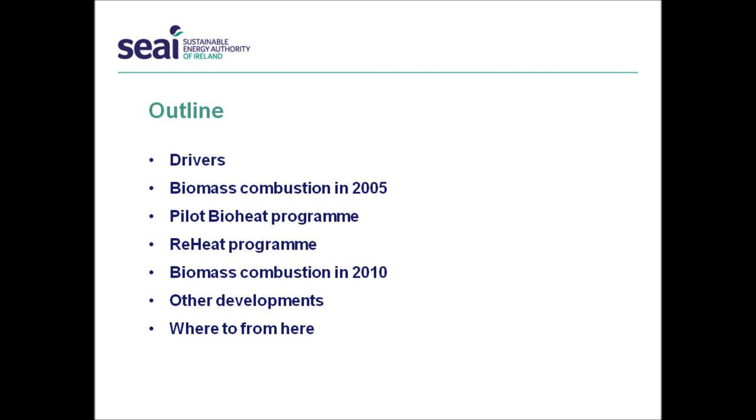So obviously the driver we're all familiar with, and I think it was alluded to earlier by Paddy, is the Renewable Energy Directive that's come in. We have targets nationally of 16% renewables in our gross final energy consumption, and 10% renewables in transport. And these are sort of devolved down to national targets, which are the 12% renewable heat that Donald mentioned earlier, 40% renewable electricity, and the 10% renewable transport. So that's what we have to achieve by 2020. That's the obligation we've committed to as a nation.

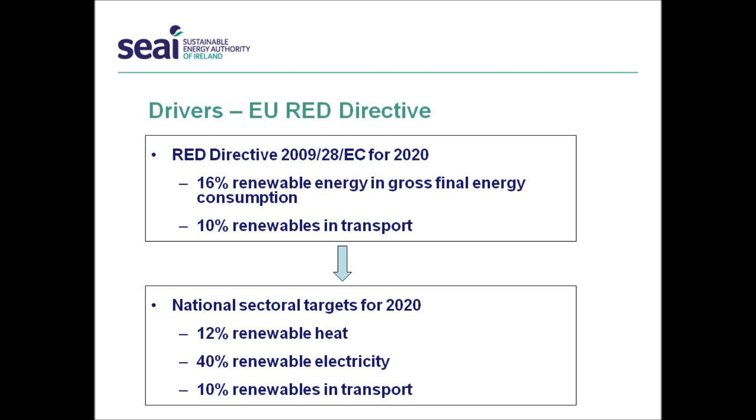So in 2005 then, where were we? Well, really, biomass heating was well established in the wood industry. The sawmills were using their residues to produce their heating for their processes, as were the board mills. So they were really the only activities in terms of biomass heating. There was domestic use, obviously, as well, but generally on a small scale and probably quite inefficient as a general rule.

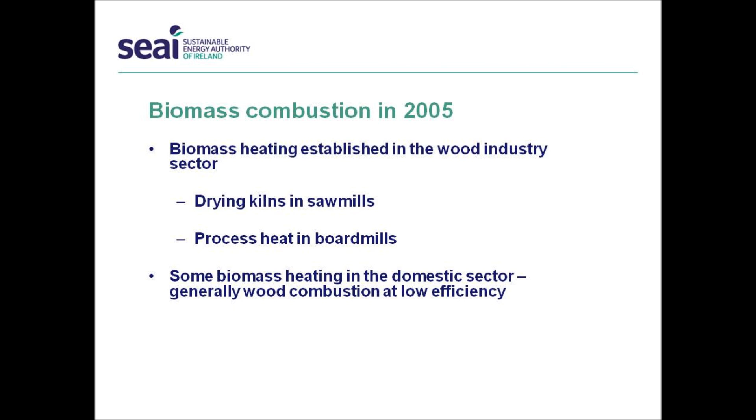So we started off in 2005 with what we called the pilot Bioheat program. And that ran for about 6 months, and it was targeted just at the commercial and industrial sector only. And the other thing we said was it was just going to be wood fuels, because there was a lot of experience in Europe with using wood fuels. There were lots of technologies. So we said wood chip, wood pellet only. We had set the capital grant at 25% of eligible costs.

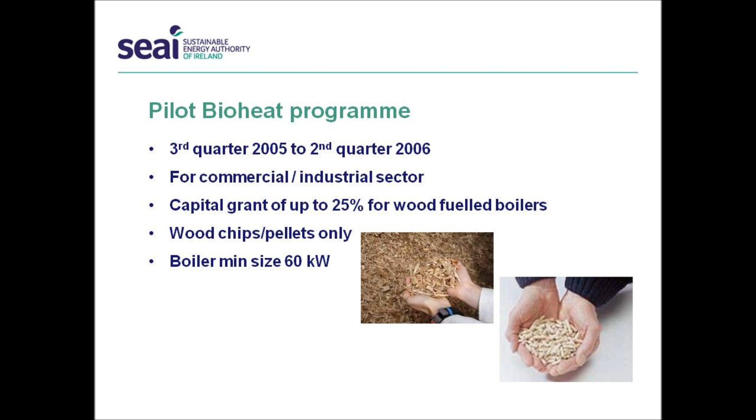And we also set a minimum size. We were really learning, and indeed we still are, but we were certainly learning. We knew very little about the sector at that point. So we also set a minimum size. We didn't want to be dealing with very small boilers, so we set 60 kilowatts. So that program, which lasted, as I say, for about 6 months, supported 17 projects with a total installed capacity of almost 11 megawatts of heating.

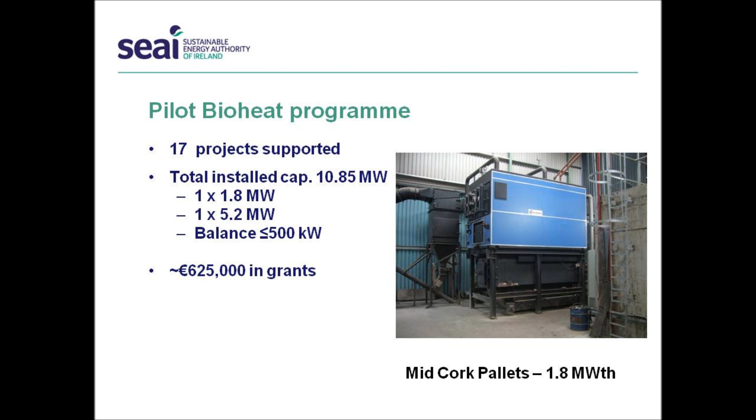Now, you can see that there were two large projects in that process. One was a 1.8 megawatt boiler, and one was a 5.2 megawatt boiler. The balance, most of the projects were sort of 500 kilowatt or less. So that's sort of indicative of the kind of market that we saw developing. In that program, we gave out a total of about 625,000 euros in grants. Now, I also have to point out that the one large one, the 5.2, unfortunately, the company that had that project made a decision on a bigger scale to move, so that boiler isn't actually there anymore. So that was the pilot Bioheat program.

And that was followed then by the ReHeat program, which came along in 2006, because the government decided to put some money into the renewable heat sector, and they committed money in the budget announced in 2005 for 2006 to 2010. Now we did a little bit more research through the pilot Bioheat, and we decided that the grant needed to go up, so we put it up to 30% of the eligible costs. We had an initial budget of 26 million for this program, the ReHeat program. Again, we restricted it to wood pellet, wood chip only, because the experience was there, again, to bring more of that into the market and try and get more deployment of these technologies in the Irish market.

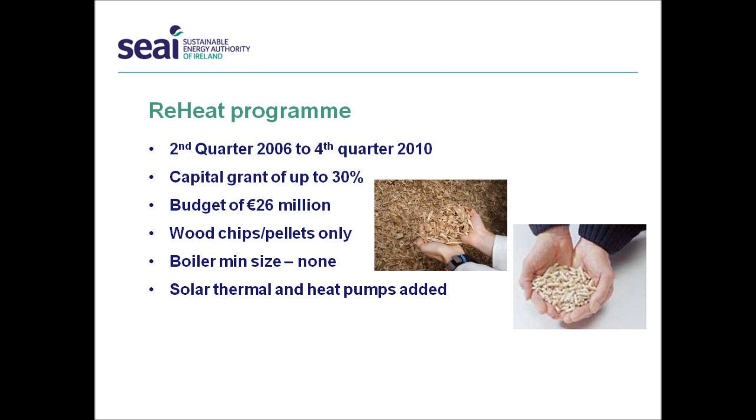The minimum size was taken away. We saw applications possibly in sports clubs and smaller scale, so we took away the minimum size requirement. But also other technologies came into the mix as well, because we're talking about renewable heat. So we're talking about bringing in heat pumps and solar thermal as well. They became part of the program. So that moved forward, and we supported programs like this.

Now, when we started off with the ReHeat program, it was primarily biomass boilers that were being put in. But you would see as the program moved over the years through 2007, 8, 9, the switch started moving towards the other renewables, which was the solar thermal and the ground source heat pumps. And I suppose we need to analyse that a little bit. It could be that the costs were more significant with the biomass as opposed to these other renewable technologies for which we were giving grants as well.

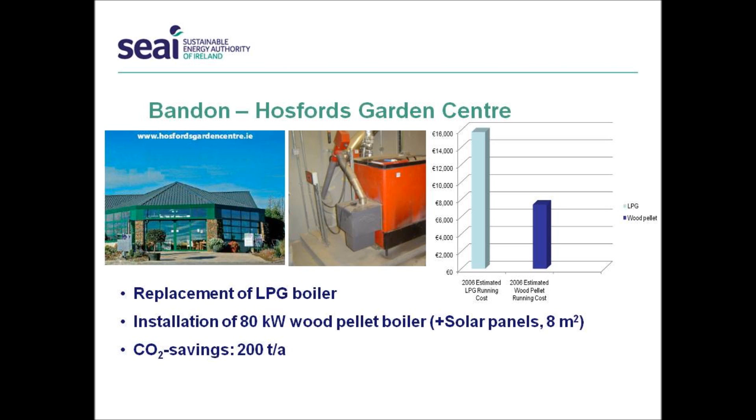But there was certainly a shift in that, and in another program I'm going to mention in a few minutes, which is the domestic program. So in the reheat program, in total we supported something like 190 projects, with a total installed capacity of somewhere of the order of 78 megawatts. Again, we had two large boilers in that program, 8 megawatt each. We had a number in the 1 megawatt, 1.2 megawatt, maybe 1.5 megawatt scale.

But again, most of the boilers that we supported under the program were in that 500 and less than 500 kilowatt scale. Now, we gave out only 8 million euros in grants for the whole program. And remember, we had a 26 million budget to start off with in 2006, and obviously things happened over the years. But nonetheless, the program did take some time to really gain momentum in the initial year, and I suppose that was again because of general inexperience with biomass boilers and the fuel supply chain and other things that were factors in that.

And unfortunately, as the experience was gained, other factors came into play, such as the budget was being cleaved off to other areas, number one, and number two, would-be developers were finding it more and more difficult to get money for the balance of the funding. So I think these were factors that were very important in play there.

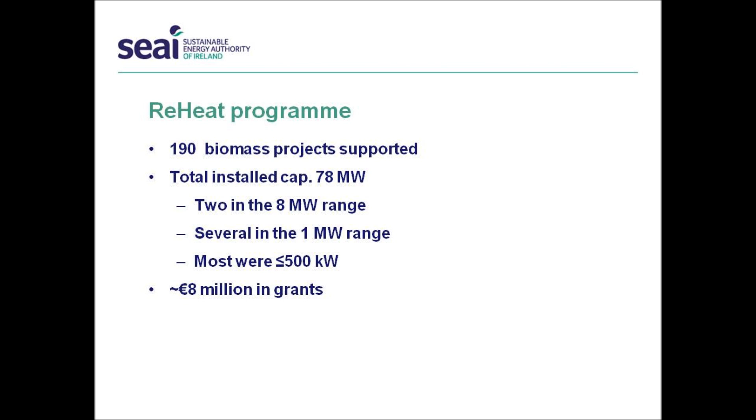Again, it covered the three technologies, biomass boilers, ground source heat pumps, and solar thermal. And there was a huge uptake from the very off of this particular program. And in fact, I think the initial budget was committed certainly within the first year. So the budget was committed for the domestic program. Over the life of this program, which went to the end of 2010 or a little bit into 2011, we supported something like 6,100 installations, biomass installations of either stoves or boilers or stoves and back boilers.

A technology, which is the one over on the right there, that was introduced later in the program, was these what are called wood gasification boilers. I think probably the correct term is two-stage combustion, but the term that seems to be most used is wood gasification boilers. And we supported about 171 of those. And you can see the grants under this program went to 78 million. So we had an initial budget of 27 million, but because of the uptake of this program, the grant commitment ended up being 78 million.

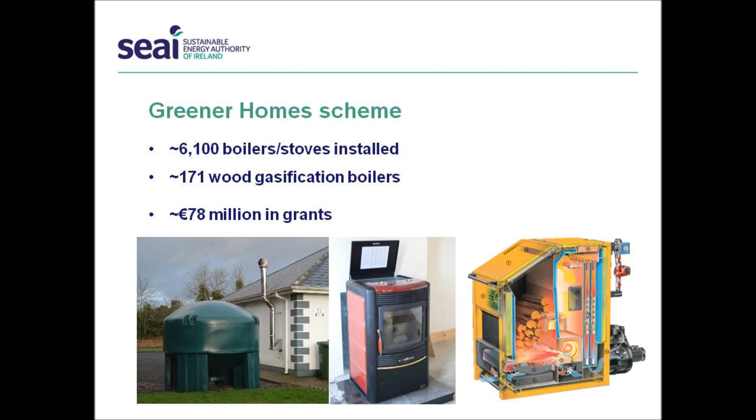So therefore, over the program, if you like, considering the pilot, the reheat, and the domestic, in the biomass sector, 6,100 domestic applications have been added, all wood pellet. 171 of these wood gasification boilers. And in the commercial industrial, about 210 installations, coming up to about 90 megawatts in total, have been added. So this is what's happened on these programs.

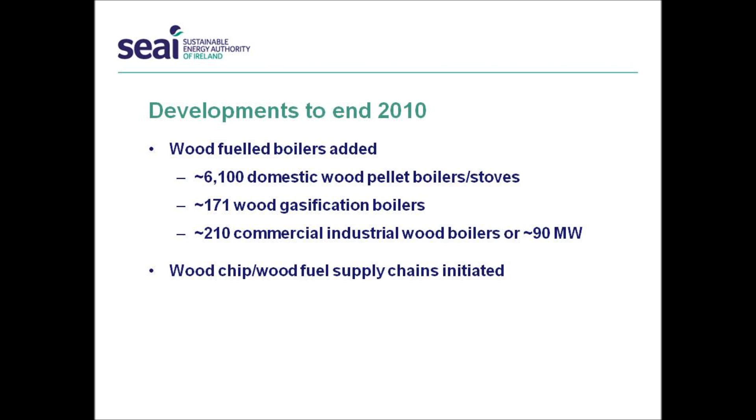Obviously, as you've seen from other presenters as well, what has happened over this period is wood suppliers have started getting into the game, if you like. They're starting to bring their systems into play. So we're getting more experience than we had with wood fuel supply chains, which I think is a critical development for the future of this sector. Some other things that have happened, well, just quickly, where are we? The last report I had was the end of 2009.

So you can see in terms of our targets that I mentioned earlier, we've got about 4.2% renewable heat now. We still have to get to 12%, so there's a significant additional amount of renewable heat that has to come on the market. In terms of renewable electricity, I suppose the policy people are thinking wind is going to do that, but nonetheless biomass is going to have some role in there. And renewable transport is one that's really going to have to do a lot. It's at 2% now. It's effectively got to go up by a factor of 5.

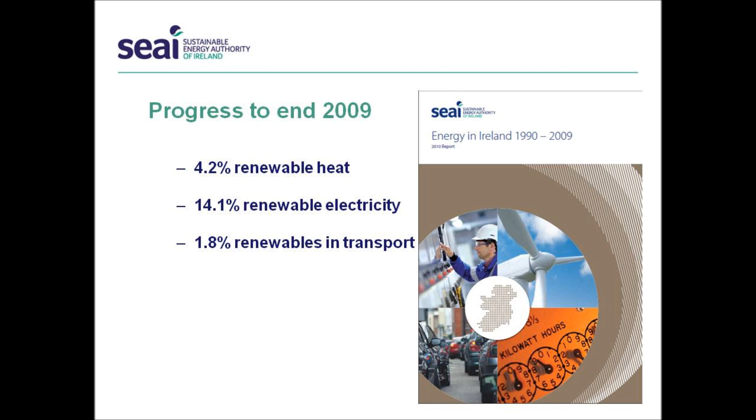So in terms of other developments in this period, we've seen wood pellet production come online in Ireland. We have D-Pellet here in Kilkenny, and their capacity is 70,000 tons a year. And Laois Sawmills recently coming on as well, and there are 30,000 tons there. So there's capacity producing quality fuels in Ireland. And we've also seen technology being developed with Kerry Die Products in Killarney, producing the dies for actually producing the pellets.

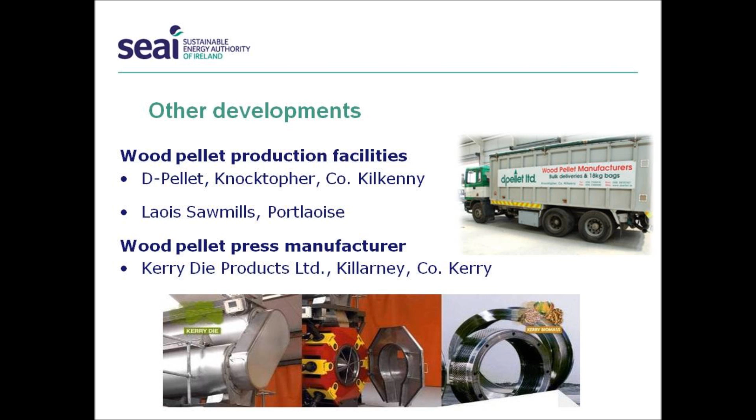This was mentioned earlier by Paddy, and I think it's a critical development here. The Wood Fuel Quality Assurance Scheme is up and running. It has these objectives to ensure a product that meets or exceeds the customer's expectations. And really, the second point there, giving confidence to the market. John mentioned market confidence for other reasons, but certainly from a fuel supply point of view, it's critical that the market knows when it's going to get quality fuel when it buys a quality fuel.

It wants to see some kind of a stamp on it that says, I can trust this, and this is what the WFQA is all about. So we really need to see this scheme. I might be wrong, but I think there are 3 registered suppliers under this scheme now. We need to see a lot more. We need to see this in every distribution. Every packet going out needs to have a mark that says this meets a certain quality standard. So that's a very important development there.

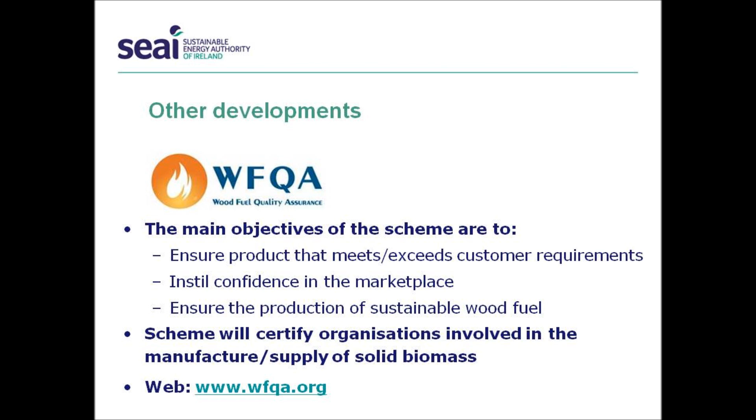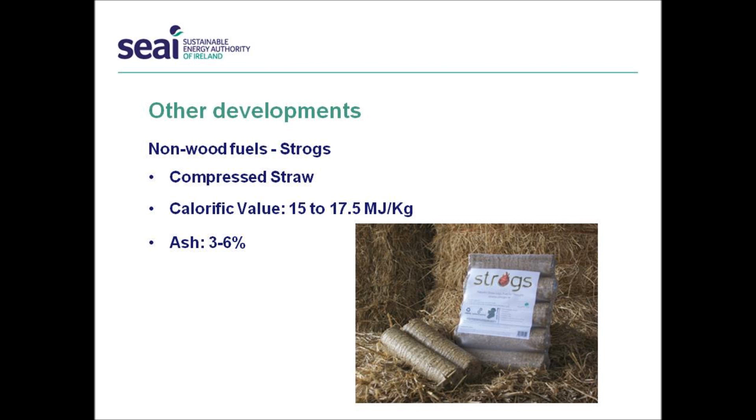Other developments, we've seen the non-wood fuels, and I think this is something that's going to be important into the future. This is an example of these Strogs that are now certainly on the market. This is pressed straw, one of the new non-wood fuels coming on the market now. And also we've seen a lot of development in miscanthus. There's been a fair bit of miscanthus grown. There have been some issues around its use in terms of one of the main users, the co-firing of peat. There is some miscanthus going into Edenderry Power, but it's certainly another fuel that we need to see the market for developing.

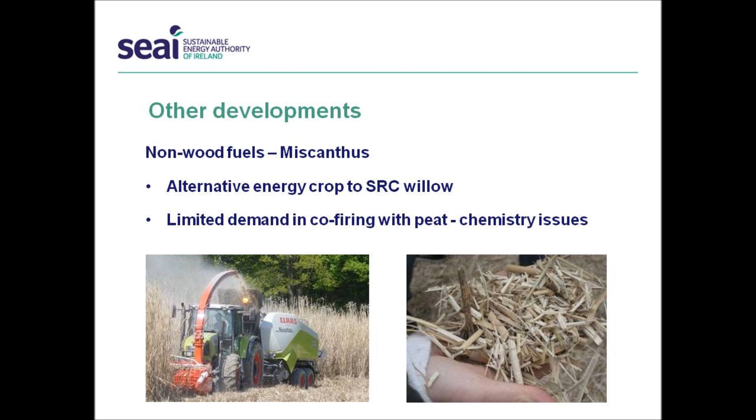We had a program, which has just closed, a miscanthus pilot demonstration program for which we had a 50% of eligible cost grant with no minimum size. It started, I think, in mid-2010, and it's now closed. Under that program, we had 15 projects we offered support to, but 3 of those projects weren't able to go ahead, I think because of the balance of funding. But 12 projects that I know of are still, in principle, going ahead. 2 of them are operating at this time. The total capacity under that program is 975 kilowatts. We've given something like 255,000 euros in grants.

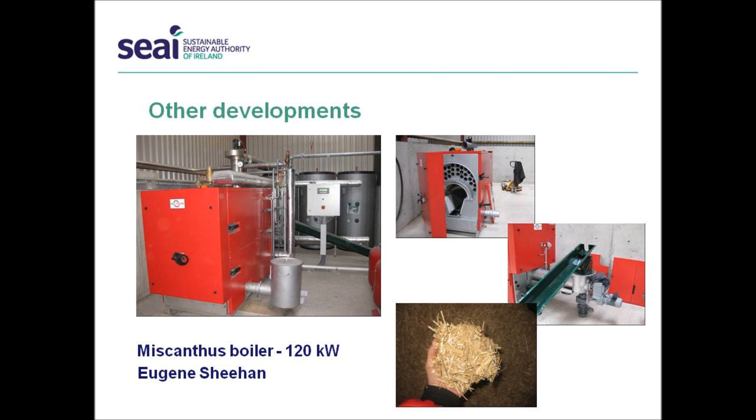And this is one of them here. It's a 120 kilowatt boiler. I think the type of boiler here is an Ökotherm boiler, and it's feeding chipped miscanthus. This project has been operating since last year. There is another one that came on stream back in the summer. And we hope that the balance will be commissioned by the end of this month to bring on the extra capacity. So these are just some general points.

The REFIT, which has gone through a traumatic growth phase, or birth phase, if you like, has passed through the European situation, and the department, I presume, will be putting something out soon to allow applications. So the REFIT is the biomass support for renewable electricity. In terms of renewable transport, from the policymakers' perspective, they've got the obligation scheme in place, and that's where they see that moving forward.

But in renewable heating and cooling, at the moment there is no support policy. Our grant programs don't have any further funding, they're closed. So there needs to be something, and as was mentioned earlier, the neighbour up north and across the Irish Sea have got significant supports in place. So the policy is not in place yet, and we need some policy in that area. The next point, as I mentioned, these non-wood fuels are there, and we need to get them into the renewable heating and cooling market. They're going to have an important part to play.